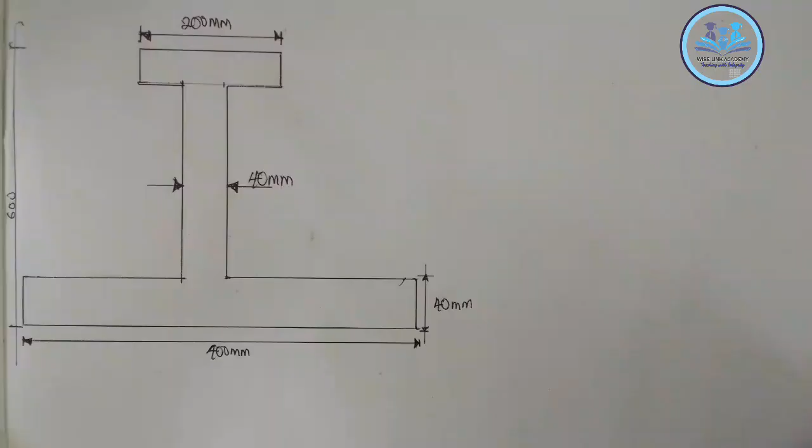Today we want to look at an aspect under mechanical engineering science, which is known as center of gravity.

Center of gravity can be defined as a point in which all the weight, all the mass of a body is assumed to act on.

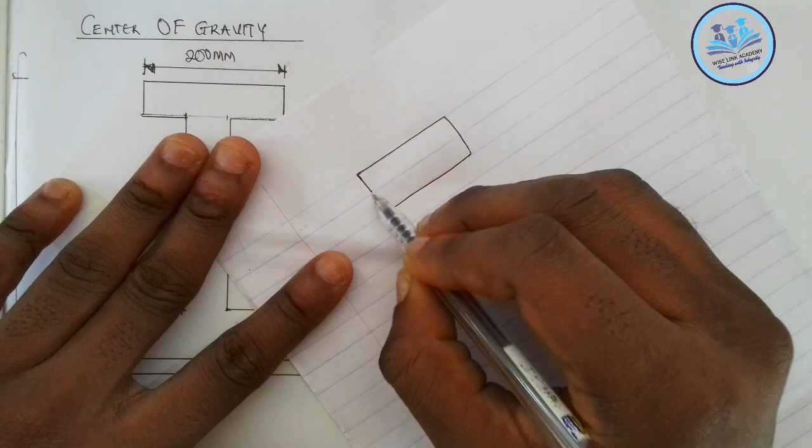That is, if I have something of this nature, a regular shape this way, and the distance from here to here is 200, and the distance from here to here is 100, I am asked to find the center of gravity along the x and y axis. Along my y-axis and along my x-axis. This is my x-axis, this is my y-axis.

Now the center of gravity along the x-axis is moving like this from here to here. The center from here to here will give you 100 automatically. So here will be 100.

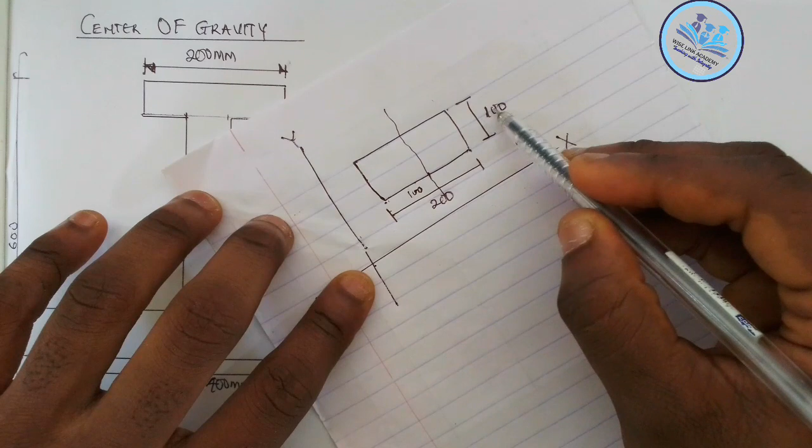Now along the y-axis, you're moving from here to here. Along the y-axis, the center of gravity is 50. So where 50 and 100 meet is this point. So along the x-axis, center of gravity is 100. Along the y-axis, center of gravity is 50. So this is what we're talking about.

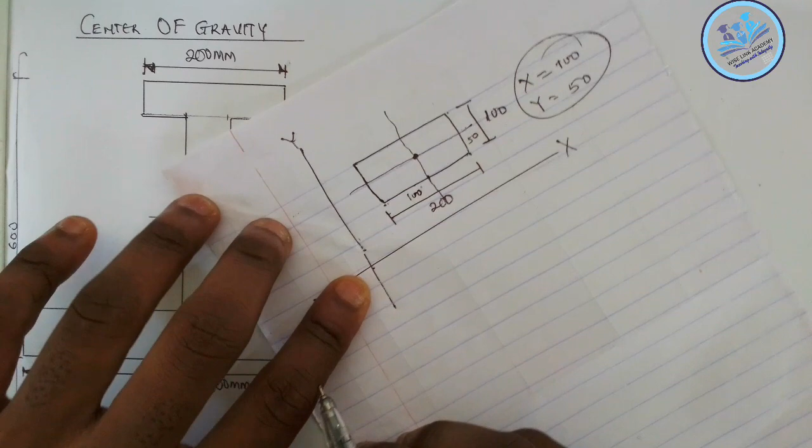Along my x-axis here, center of gravity is 100. Along y-axis is 50. So where they meet at this point is the center of gravity. That's just basic simple knowledge about this.

So now we have to find the center of gravity of this figure shown here. Before you do anything, we look for a way to divide this into the least possible divisions you can divide this shape into. Before we start that, let's look for the way we can divide this. I can divide this into three components.

That is, I can close here up, and I can close here too up. So I can call this component 1, component 2, and component 3. Now what you do is repeat what you have done, by drawing this figure out.

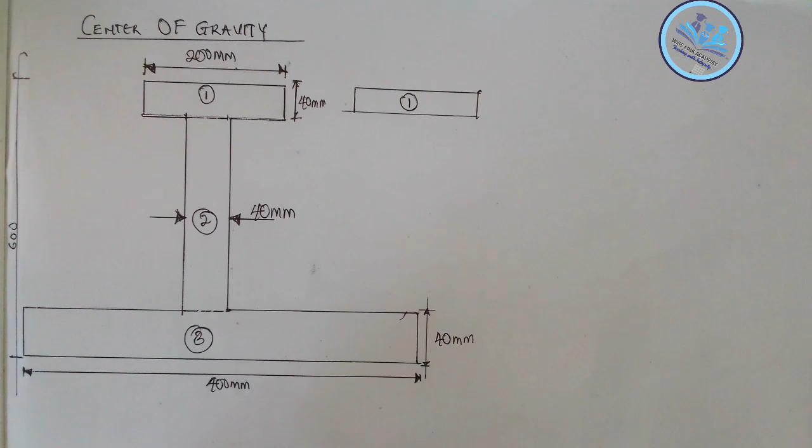Now for this component 1, I've left something out - the distance from here to here is 40 millimeter, I've omitted it, so it's 40 millimeter. Next, this figure 1 has 200 millimeter to be here and 40 millimeter to be here. For this one, it looks something like this.

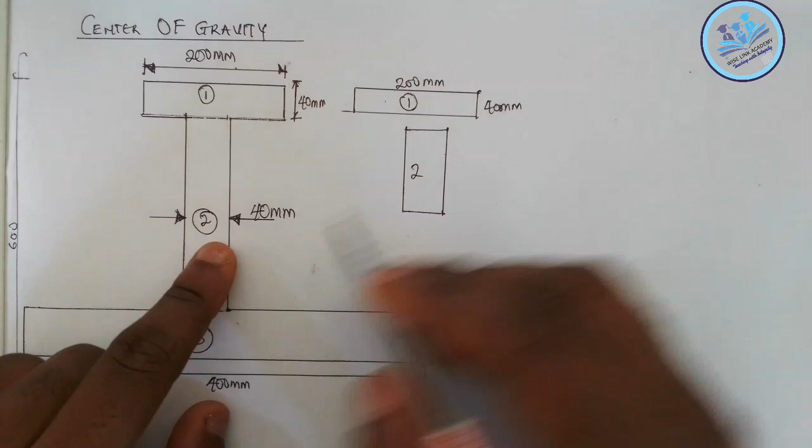For component 2, this simply means thickness, that is from here to here is 40 millimeter, and the distance from here to here - since distance from here to here is 600 - distance from here to here: 40 plus 40 is 80, so 600 minus 80 will give you the distance from here to here, which is 520, if I'm not mistaken.

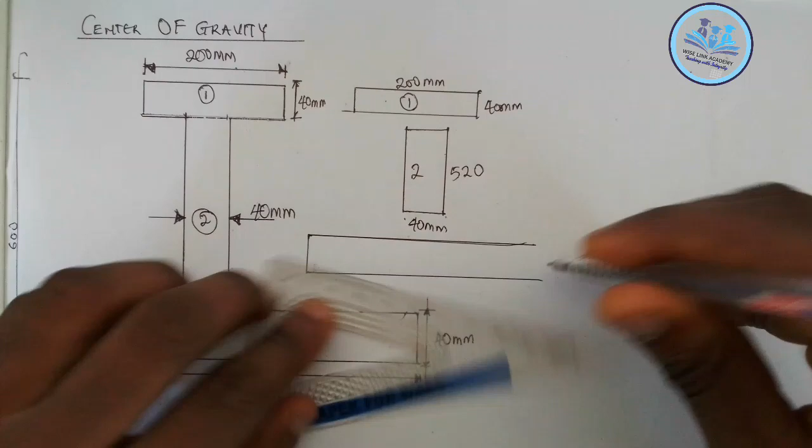So this is component 3. Am I right? I have replicated what I'm having here to be this. Now if I want to start calculating my center of gravity, I'll calculate the center of gravity along the y-axis, and also along the x-axis.

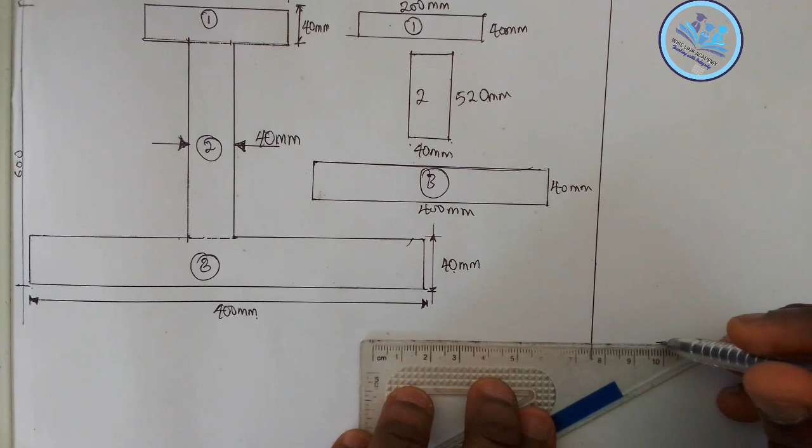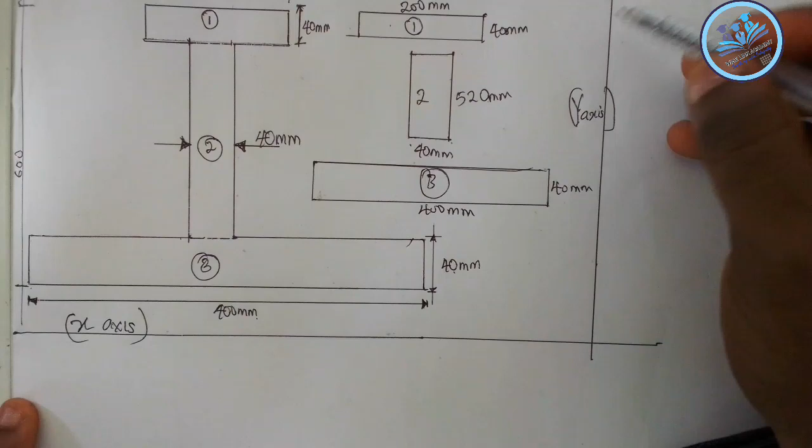So along the y-axis, along my y-axis, along my x-axis - let's add it. As you can see, along the x-axis and along the y-axis. So now let's stop. I'm calculating for my center of gravity along x and y. So what to do now is let's start to calculate for the center of gravity along the y-axis.

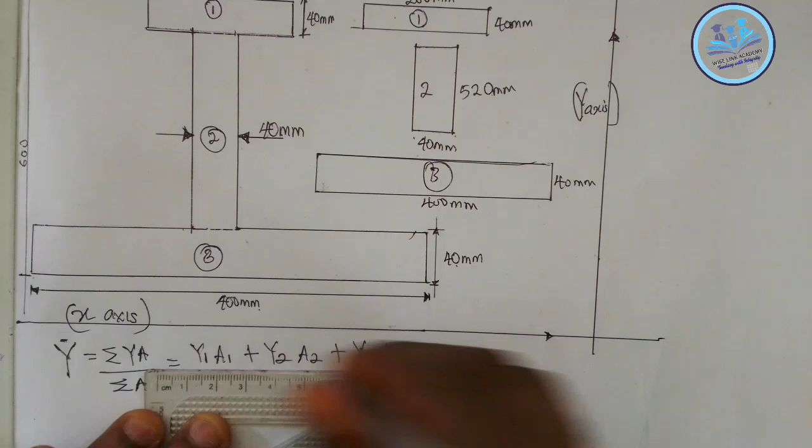Now center of gravity along the y-axis is y bar, which equals summation of ya over summation of a. That simply means y1 a1 plus y2 a2 plus y3 a3, over a1 plus a2 plus a3.

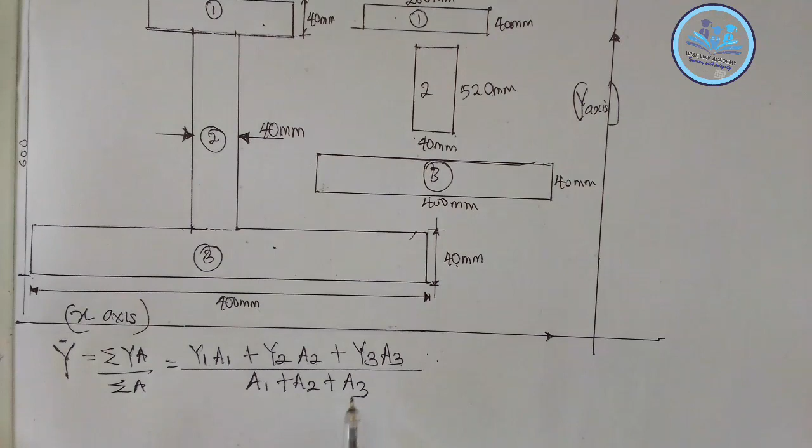Now what do you notice? You're having a1 y1, y2 a2, y3 a3. You can continue y4 a4, y5 a5, because we're having 3 components here, that's why we have all this to be 3. When you're having 4 components, you extend it to y4 a4, and likewise a3 plus a4 plus a5, depending on the component you're having. Now this is the formula for solving a center of gravity along the y-axis.

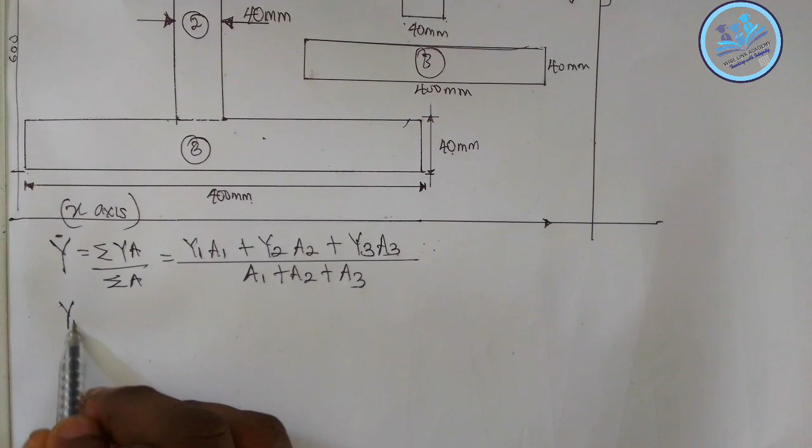Now let's stop. After you have successfully applied this formula, the next thing for you to do - let me show you what I'm doing. The next thing to do is to take your y1, y2, and y3 this way. My y1 to be this, my y2 to be this, and my y3 to be this. Let me show you.

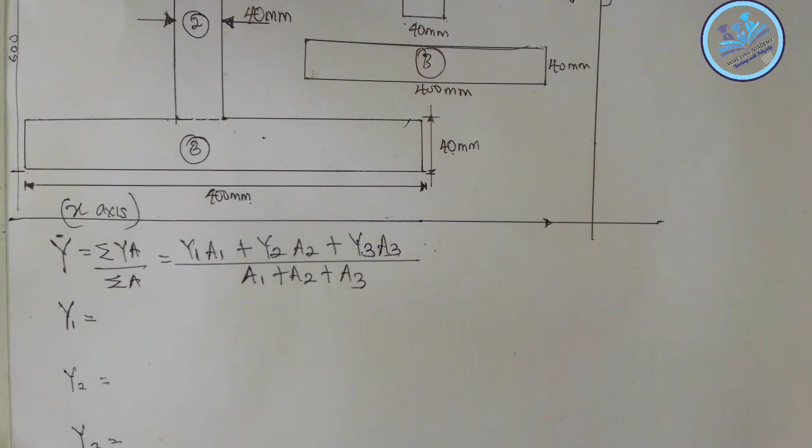Now I want you to recall something here. My y1, that is center of gravity along the y-axis. We are moving upward along the y-axis.

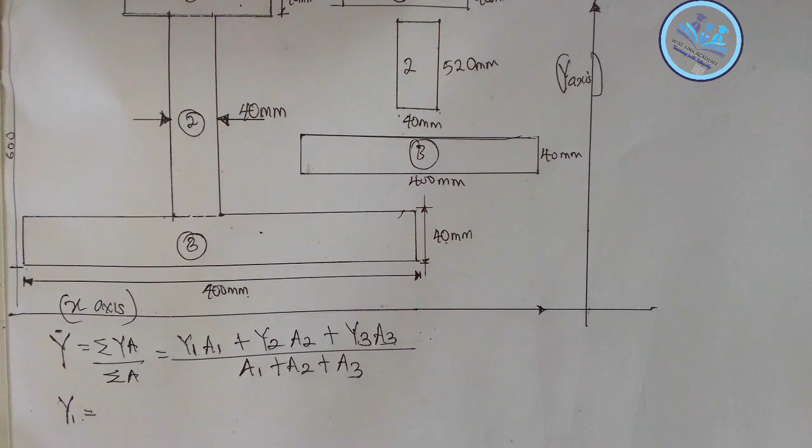y1 simply means center of gravity along component 1. And my component 1 is this one.

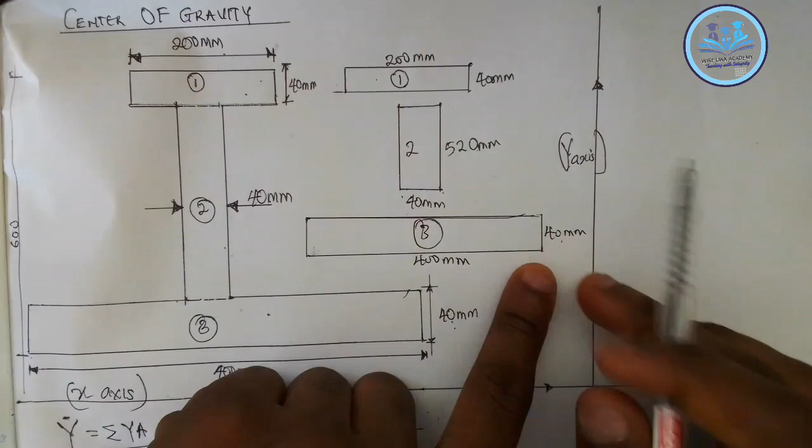For me, this is the ground floor, first floor, and second floor. For me to move from the ground floor to the second floor, I will travel 40 plus 520 before I get to component 1.

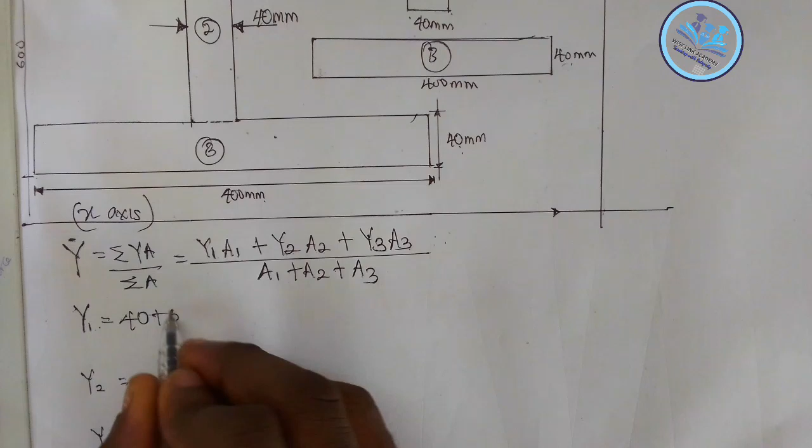Plus, center of gravity along y-axis for this is 20, so just write 40 divided by 2.

So I'll be having 40 plus 520 plus 20. If I add them up, I'll be having 580 to be my answer. So center of gravity along y-axis for component 1 is 580.

Now let's proceed along y2, that is along component 2. If I move to component 2, this is the first floor. I will pass through the ground floor.

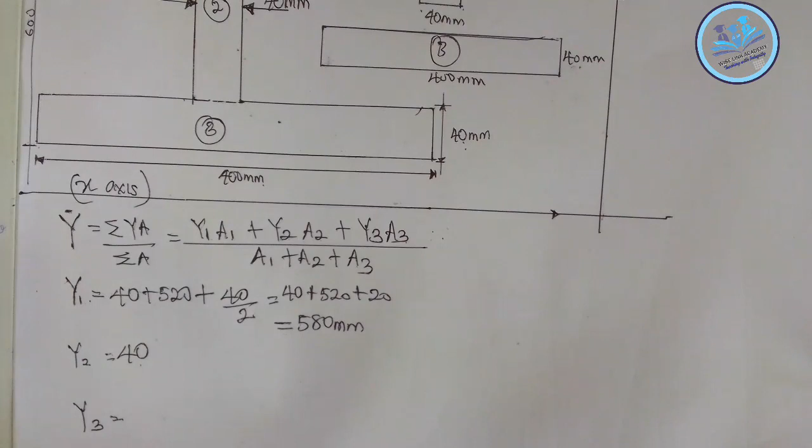So for me moving from this point to this point, I've covered a distance of 40. Don't forget millimeter. So put down your 40, then plus.

Now let's determine the center of gravity along component 2's vertical y-axis. From here to here, the center will be half of this, so you write 520 divided by 2. Automatically I'm having 40 plus, if I divide this, I'll be having 260. So add them up, I'll be having a value of 300 millimeter.

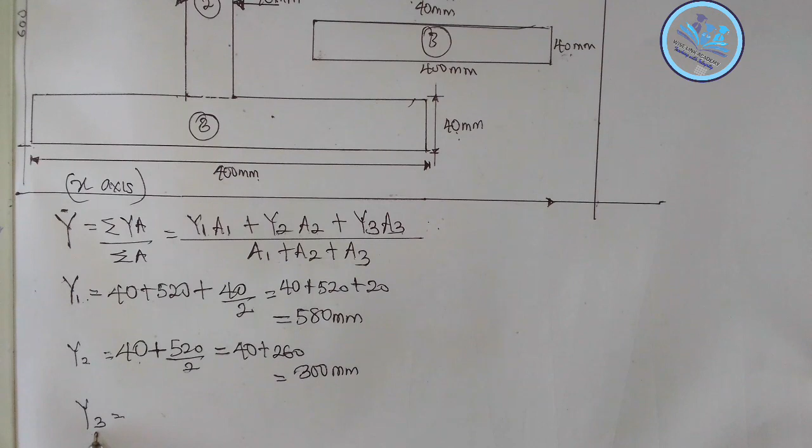Next up, y3, that is center of gravity along y-axis of component 3. Before I move to component 3, will I move any distance? No. So I'll write 0 here, I'll not move any distance.

0 distance plus center of gravity along y-axis for this, which is 20, so just write 40 divided by 2. That will now give your 20 millimeter. Don't forget, in this formula we're having y1, y2, y3.

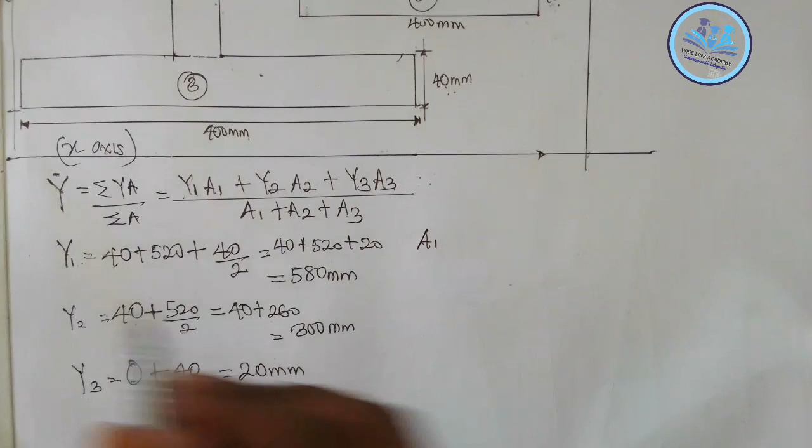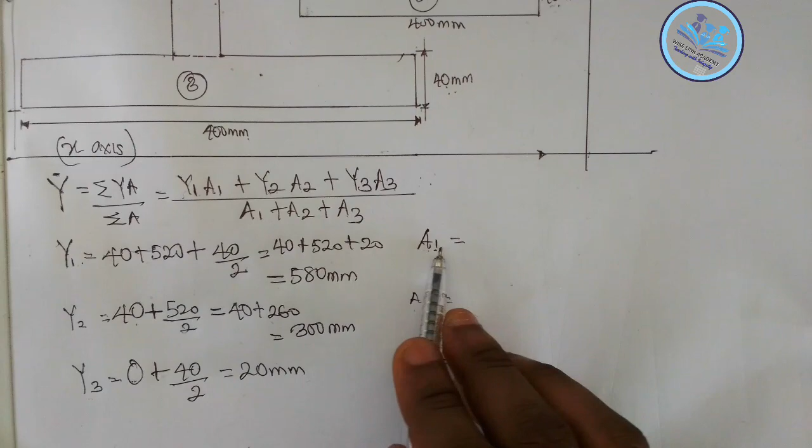We have done that. So we're having a1, a2, a3 — put them here. A1 for y1, a2 for y2, a3 for y3. Now, area of component 1, area of component 2, area of component 3. They are all looking like a rectangle, am I right?

So to find the area, you just multiply them together: length times breadth, length times breadth, length times breadth. Along component 1, I'm having 200 times 40. Time them together, you'll be having 8,000.

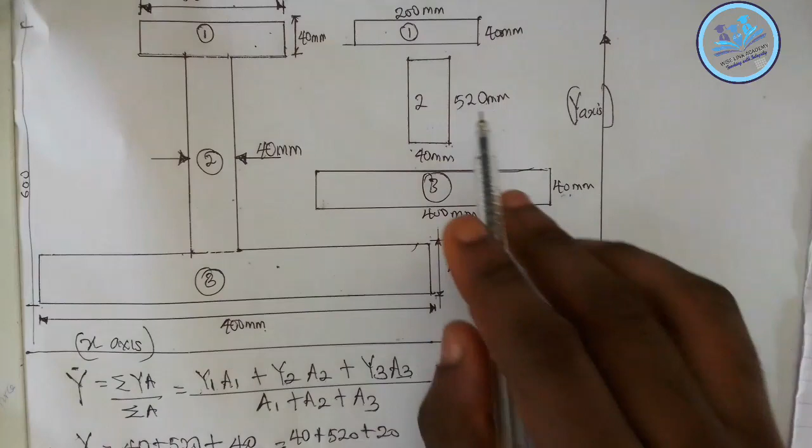So area of component 2 is 520 times 40. Times them up, you'll be having 20,800. Component 3, the area of component 3.

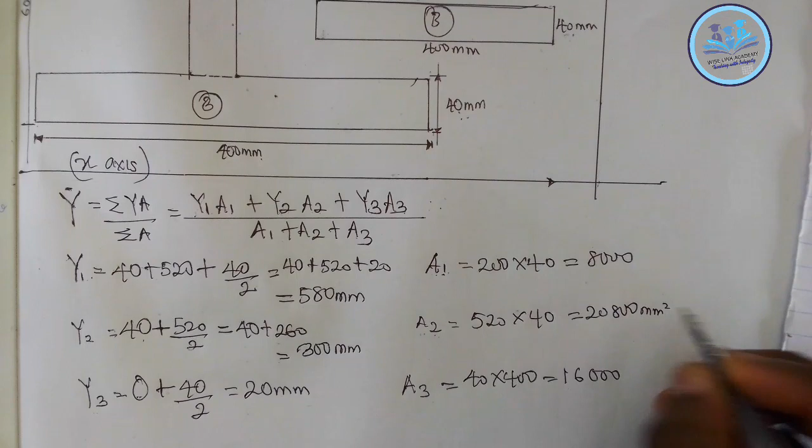Length times breadth, this times this, I'll be having 40 times 400. If I do that, I'll be having 16,000. Don't forget millimeter square, millimeter square, millimeter square.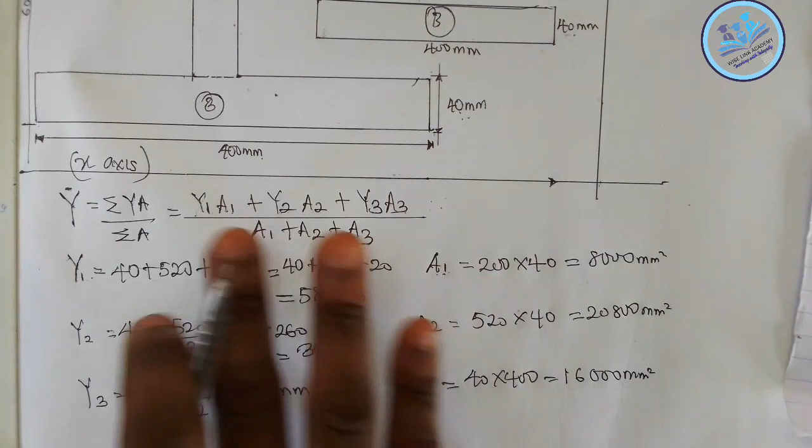Now I have calculated all what I want: y1, a1, y2, a2, y3, a3. So next up, now let's apply the formula to solve the question.

y bar is equals to y1 times a1. y1 is 580, times a1 which is 8,000. We bracket it this way. Plus y2, a2. y2 is 300, a2 times this gives 20,800.

Plus y3, a3. y3 is this, a3 is this, you times it together, that's 20 times 16,000. So divided by a1 plus a2 which is 20,800, plus a3 which is 16,000.

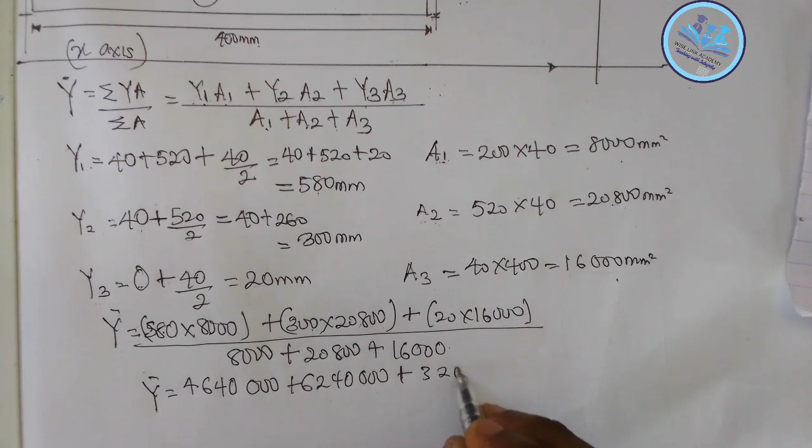Now my y bar will automatically be — if I times this and this together, I'll be having 4,640,000. Plus if I times this value together, I'll be having 6,240,000. Plus if I times this value together, I'll be having 320,000. Now divided by what? If I sum up all this, I'll be having 44,800.

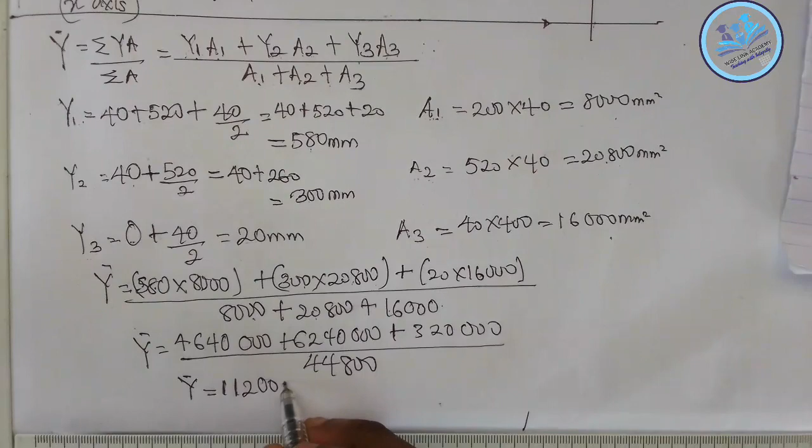So my center of gravity along y-axis will now be: y bar equals, if I sum up all these values, I'll be having 11,200,000 divided by 44,800. If I divide the two of them, I'll be having 250 millimeter. So center of gravity along y-axis is 250 millimeter.

Now, let's go and calculate for center of gravity along the x-axis. So now to do that, let me show you at this point here.

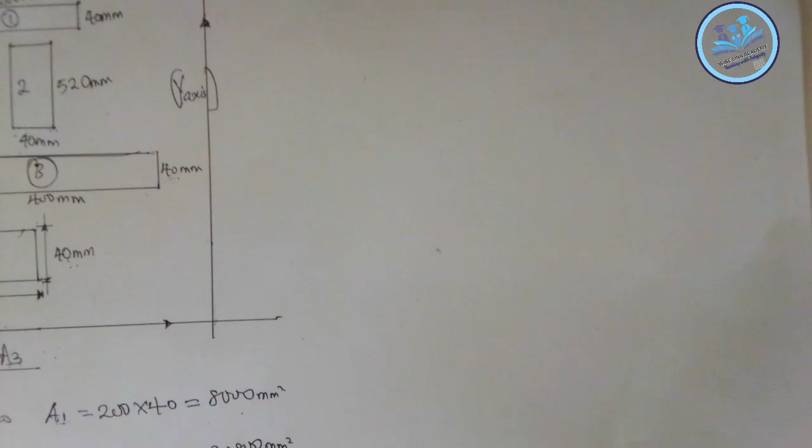Center of gravity along x-axis, x bar. The formula says center of gravity along x-axis is the same as summation of xa over summation a. That is x1a1 plus x2a2 plus x3a3, since I'm having three components, divided by a1 plus a2 plus a3.

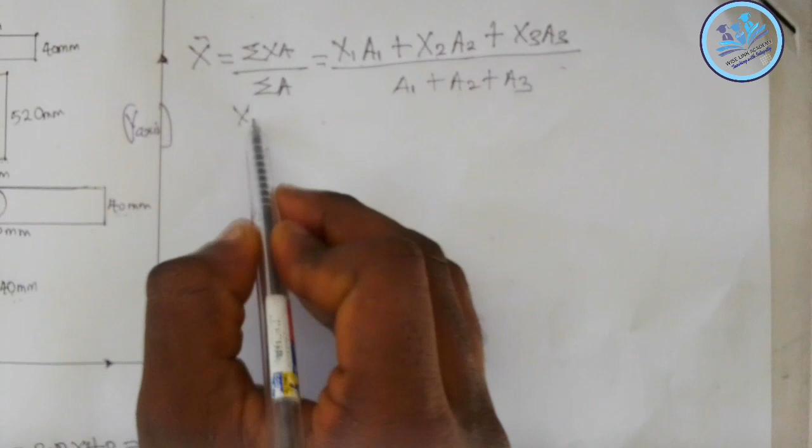Let me show you what I'm saying: x1a1, x2a2, x3a3, over a1 plus a2 plus a3. It's the same idea as the y-axis formula, just change y to x. So we write x1, x2, x3 here.

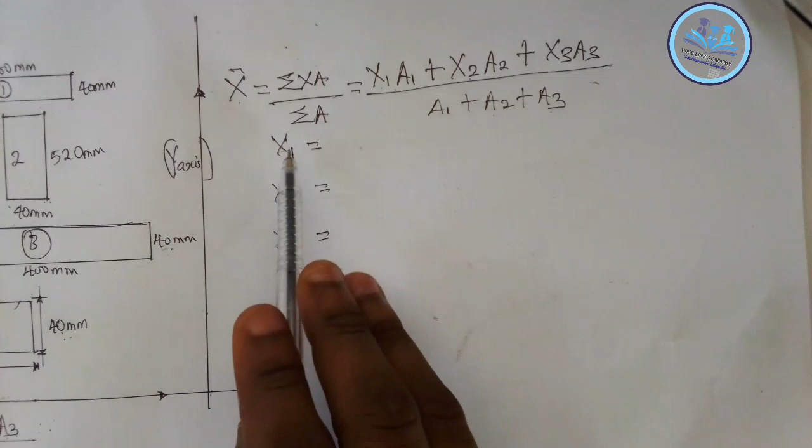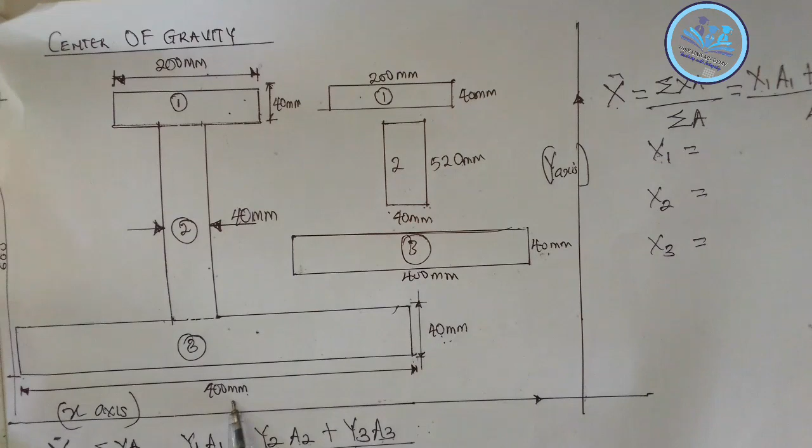Now calculating center of gravity along the x-axis for component 1, let me show you how it's done using this plane figure. Observe from here to here is 400.

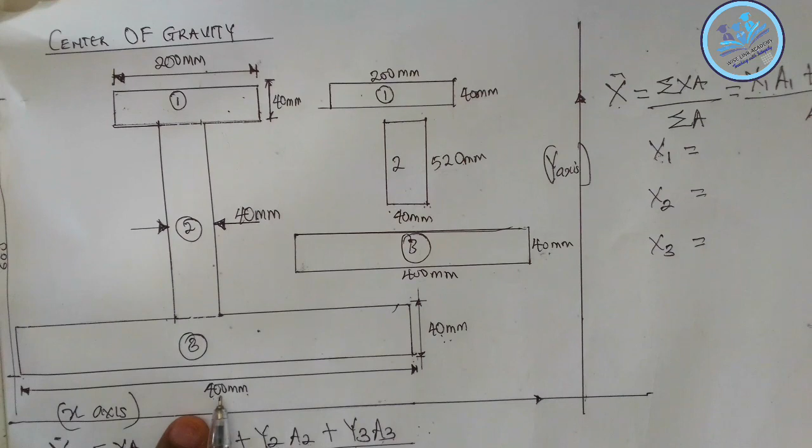Now what is the x-axis distance for component 1? Before this, from here to here is 200. Before I move to 200, I'll cover a distance of 400. Understand this well. So 400 divided by 2 gives 200 here and 200 there. For me to move from here to here, I cover a distance of 200. From here to here, also 200.

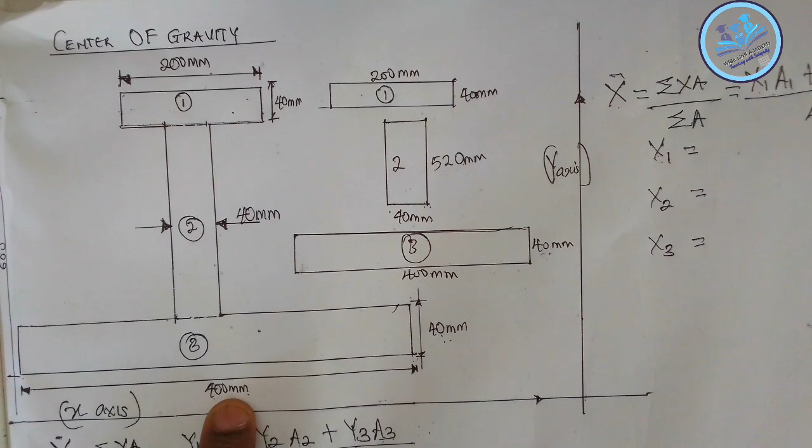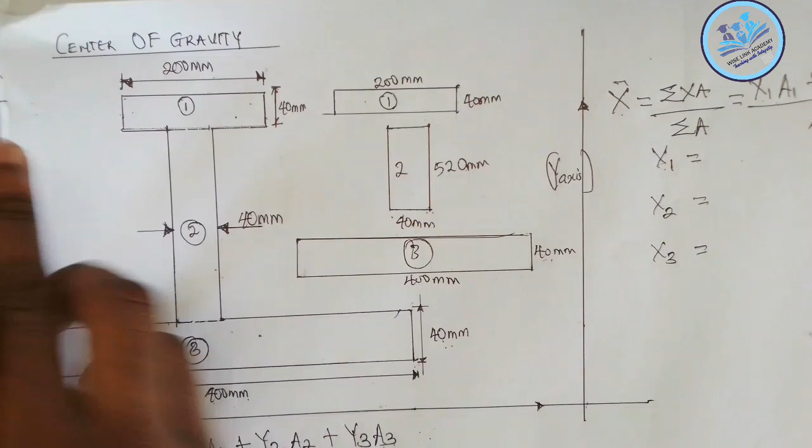Let me explain again: this is a distance of 200. If you put this 200 down here, you're left with 200, so 100 here and 100 here. The distance from here to here is 100. Similarly, taking this up with 200, 100, 100 gives us 400. So 400 minus 200 gives us 200. With 100 here, 100 here, and so on, that totals 400 along the x-axis.

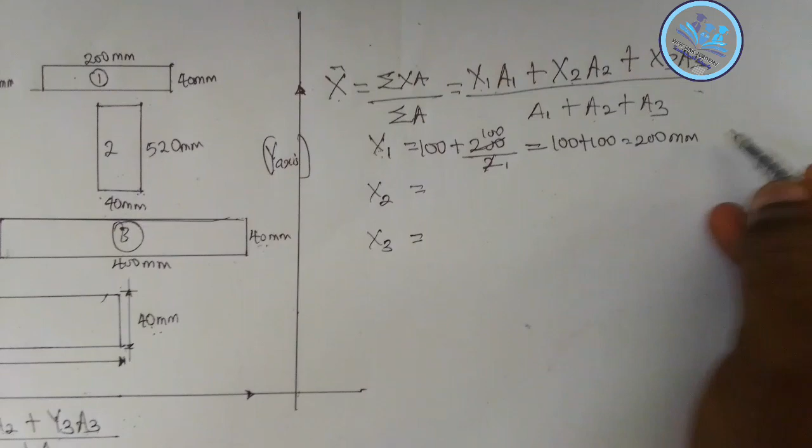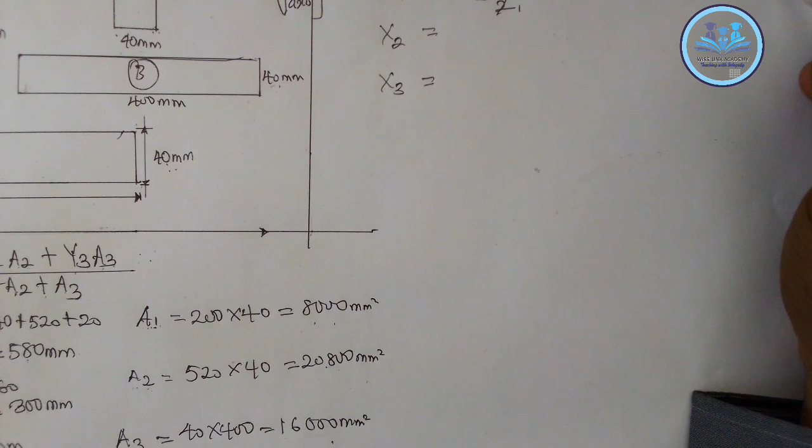A1 is 8000 millimeters square. So now we put that value down: 8000 millimeter square. Therefore for the x-axis, these two x-axis values.

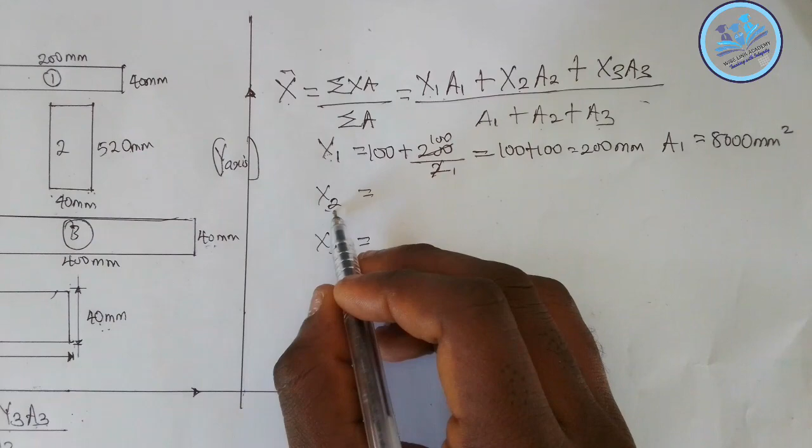Let me show you: this is my plane figure this way. Now this has a distance of 40. I want to know the distance it covered before it moved to 40. That will be 400 minus 40.

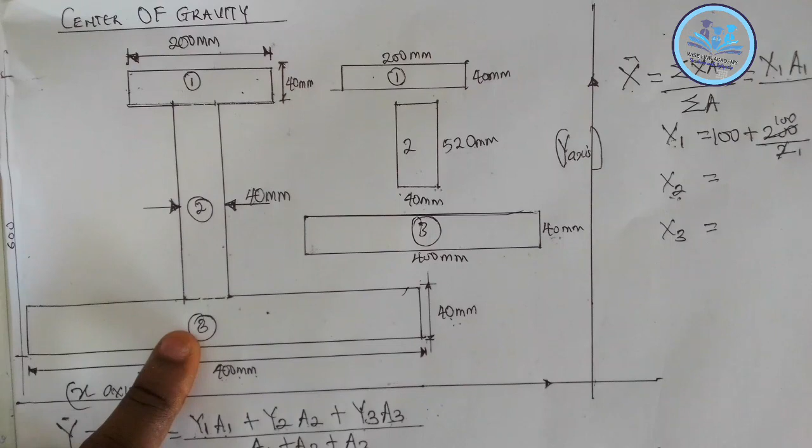That gives us 360. Now 360 divided by 2 is 180. So from here to here is 180, from here to here is also 180. Plus 40 is 400. So for me to move from here to this point on the x-axis, I'm moving like this. For me to move from here to here, I'm moving 180.

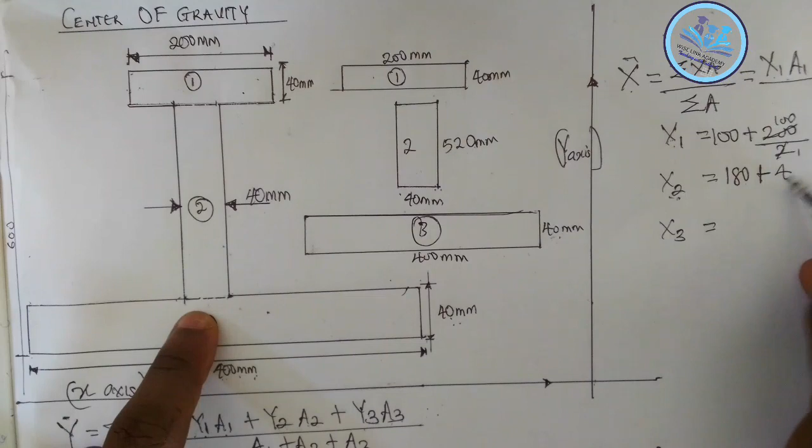180 plus... so I move a distance of 180, plus the center of gravity along x-axis, which is 40 divided by 2, that is 20. So 180 plus 20 gives us 200 millimeters. So area 2 is the same as that area 2 we got, which is 2000 millimeter square... actually 20,800.

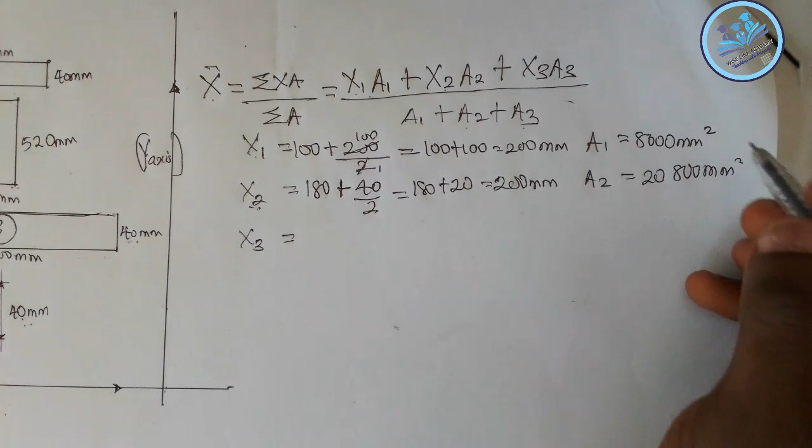That is 20,800. Let me show you: this is my area 2 here.

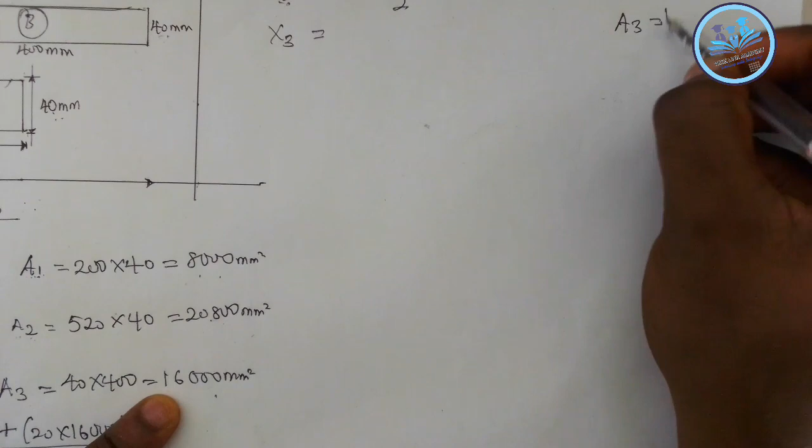Similarly for area 3, let me put it down this way. Area 3 is this value, 16,000 millimeter square. Now let's calculate the x-axis value for component 3, using this plane figure.

Distance from here to here is 400 automatically. Did I cover any distance before moving to this point? No distance covered, so that's 0 plus this 400 along the x-axis divided by 2, giving us 200 millimeters. What do you observe? 200, 200, 200. Let me show you what I'm saying.

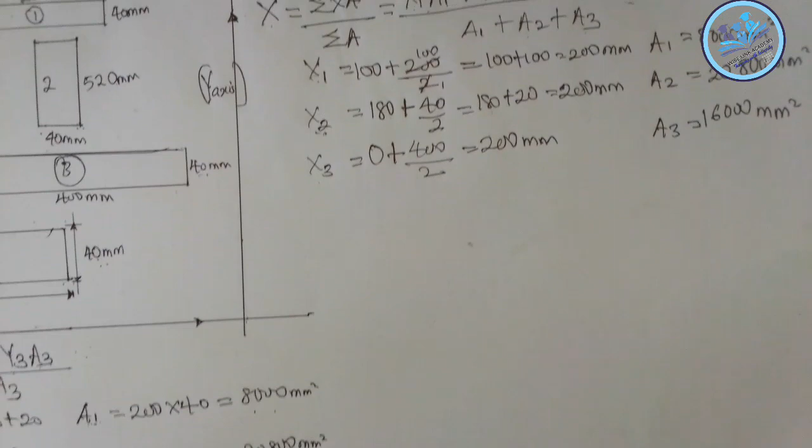As you can see, I'm having 200, 200, 200 along my x-axis. So I have to find from my x-axis x1, x2, x3, a1, a2, a3.

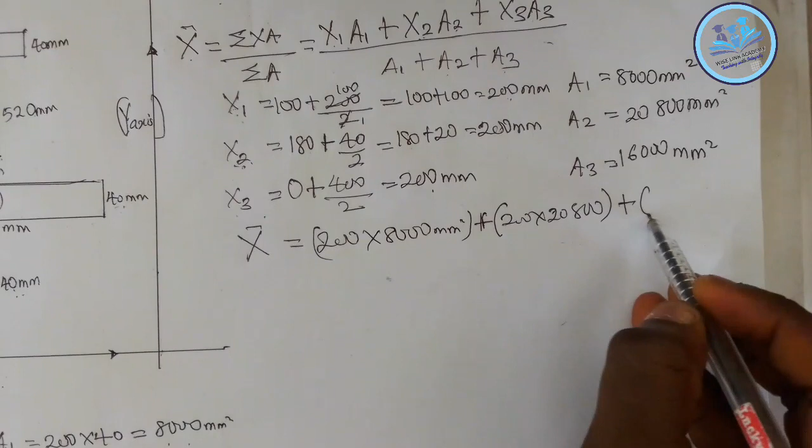Now let's substitute the values. My x bar equals x1 times a1. Value for x1 is 200 times a1, millimeter square, plus open bracket x2 a2, that is 200 times 20800, plus open bracket, my x3 a3, x3 is 200 times a3.

16000, so divided by, as you can see, a1 is 8000 plus a2 is 20800 plus a3 is 16000. So my x bar will now be, if I times this together I'll be having 1,600,000, plus if I times this together I'll be having 4,160,000, if I times this together I'll be having 3,200,000. So divided by, add this together, I'll be having a value.

If I add this together, this value down here, I'll be having 44800. So my x bar will now be, if I add them together here, I'll be having 8960000 divided by 44800. So my answer, my x bar will now be what?

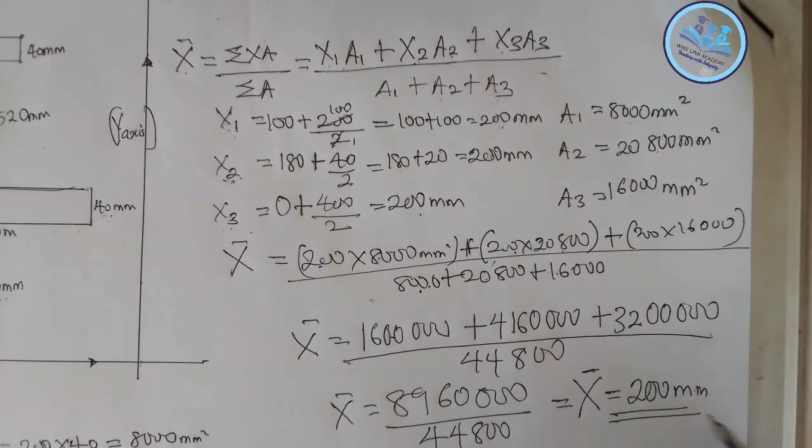My x bar is equals to, center of gravity along x-axis is 200 millimeter. So my final answer: along my y-axis, center of gravity along y-axis is 250 millimeter. Along my x-axis is 200 millimeter. This is our answer.

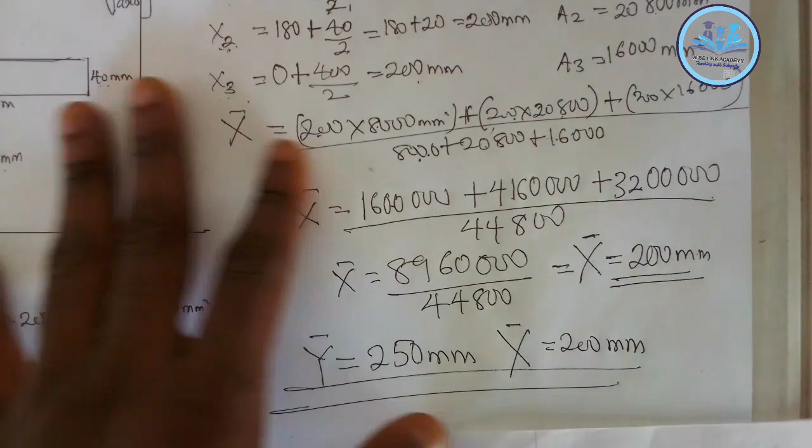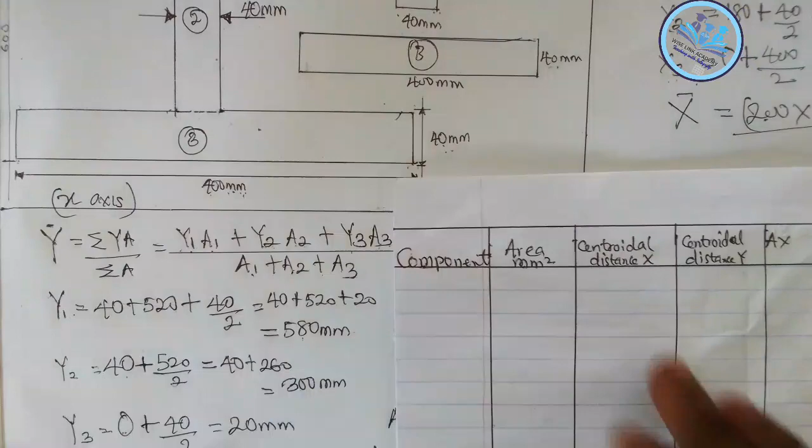But if we are given a table this way, to complete this table, after you have solved all this, as you can see what I've solved. Now, how many components do we have here? We have just 3 components: Component 1, component 2, and component 3.

So area for component 1, we come to this point here. Area of component 1, area of component 2, area of component 3. So we know that their area is the same if you observe very well. Area for y-axis, x-axis, we are using the same area for all of them. So our area is what?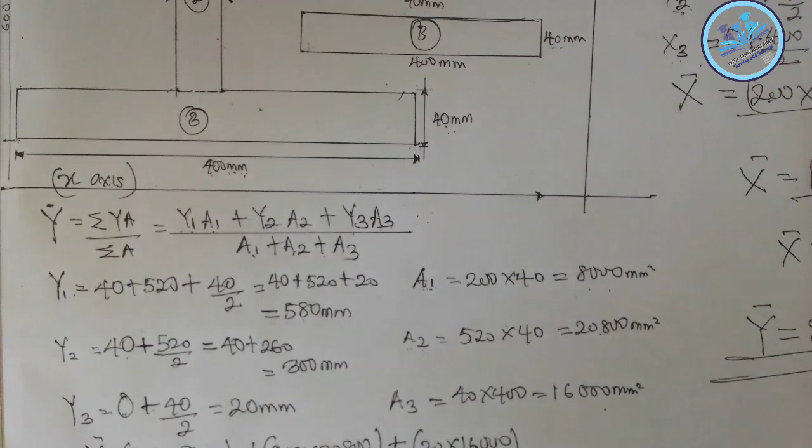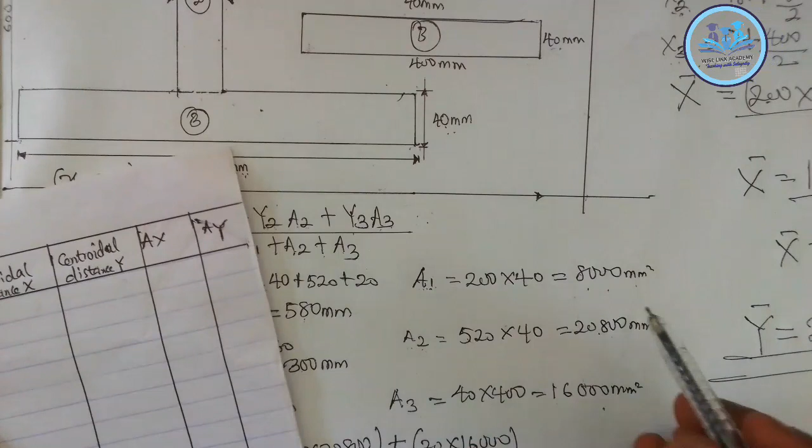The first A1 is 8,000. Area for this is 20,800, for component 3 is 1600, 16000. Is it here? Am I right?

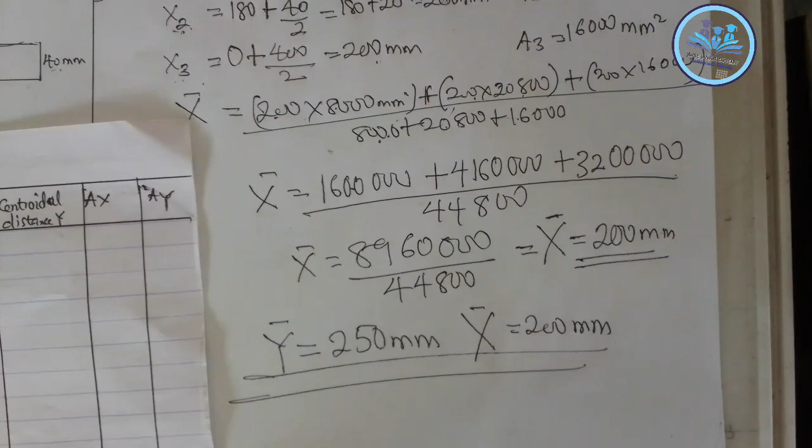Now, centroid distance along x-axis, that is center of gravity along x-axis for component 1. They are all here, just insert the values. That is, I'll show you.

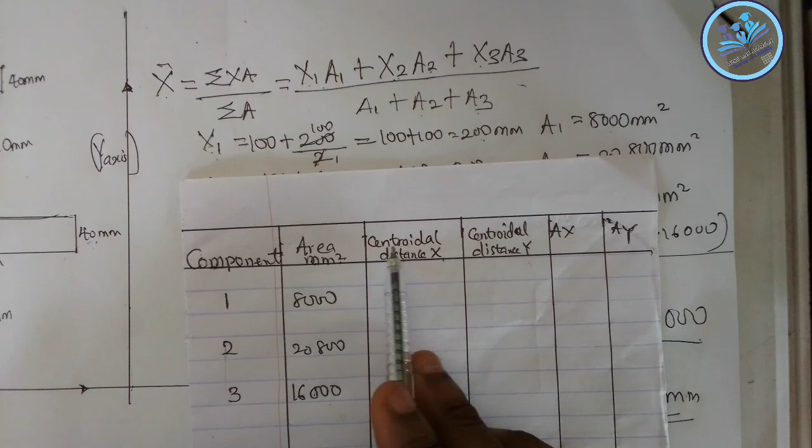Now you take your reading this way. So centroid distance along x-axis. Am I right? So along my x-axis, center of gravity is 200. So it's two, all of them is 200. X2, 200, X3 is 200. Along my y-axis, you come to your y-axis.

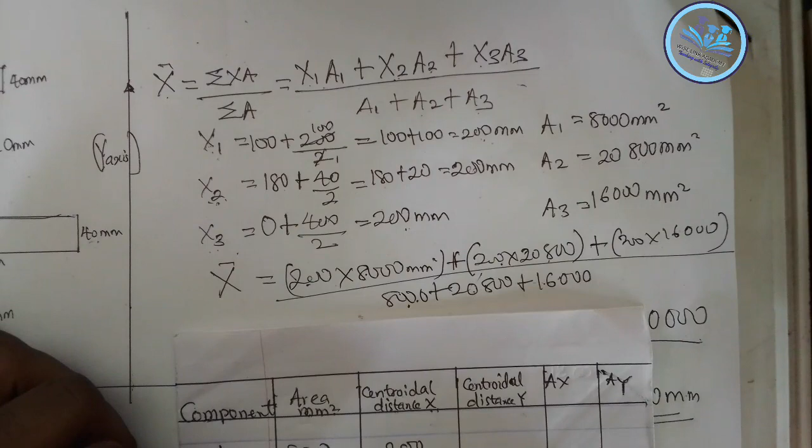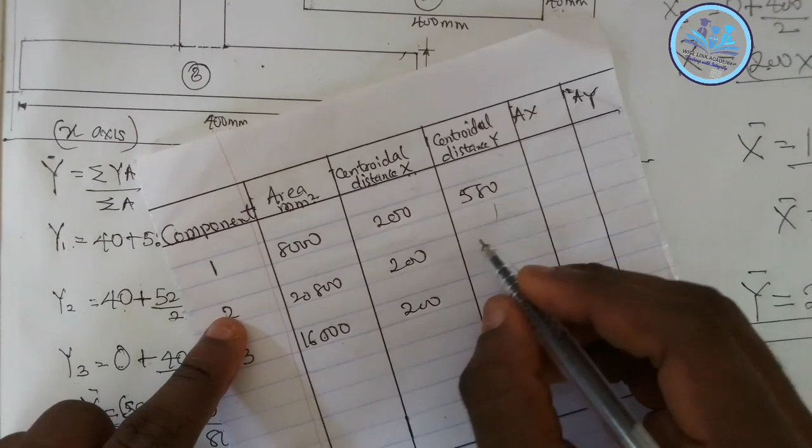My y-axis, I'm having center of gravity on y-axis on component 1 is 580. Component 2 is 300, I'm having 300. Component 3 is 20, I'm having 20 this way. As you can see what I'm doing.

So now the last one is AX, it's just A times X. Can you see that? Component 1, A times X, you get your answer. Component 2, A times this, A times X, yes, you get your answer. Component 3, same A times X, this times this, you get your answer. We have done those, we have done everything, just insert them.

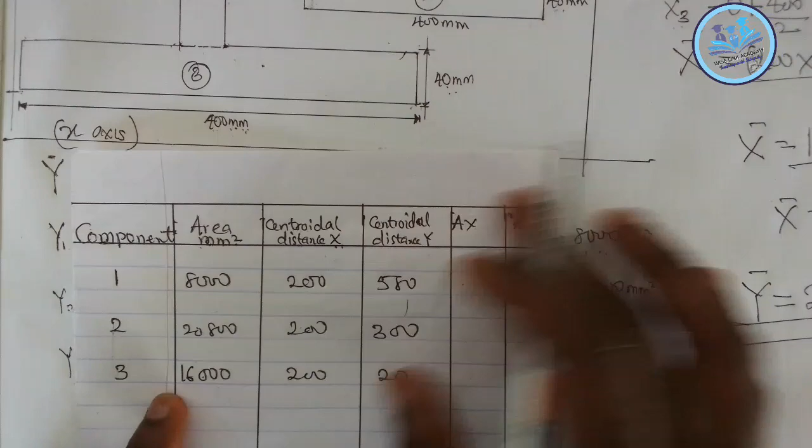Now come to, let's start with component AX. See, come to component AX, come this way. Take your value upward this way. So now, looking at it, my component AX will be, this is my AX. That is, if I take my readings, AX will be, this is AX.

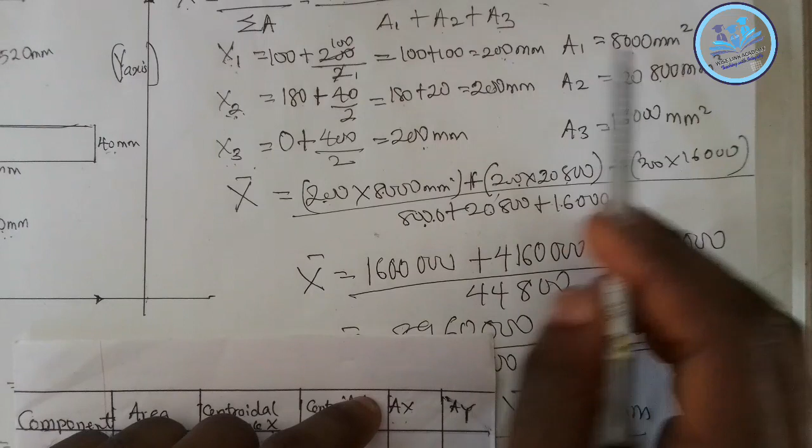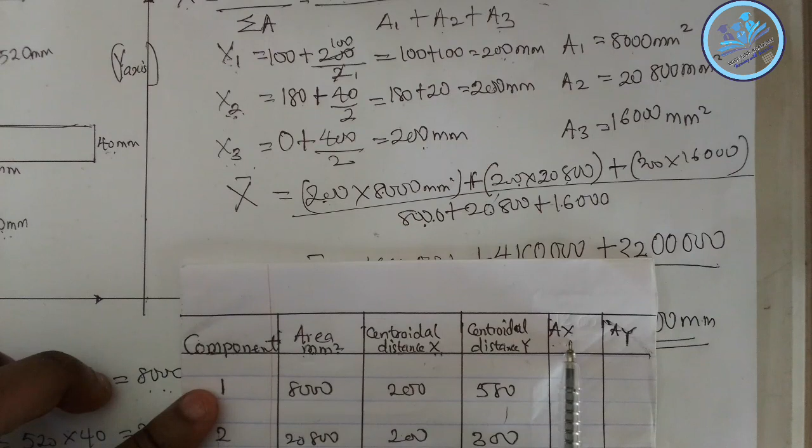AX, now for component 1, component 1 is this value. Component 2 is this. Component 1 area is this value. So if I times together, that will give you AX. So my AX for component 1, along x-axis, the x times A, for this is area times x, that is x1 times A1, because I do component 1, so x1 times A1, so the value is what given us here. This answer is what I'm able to write here. So answer is what?

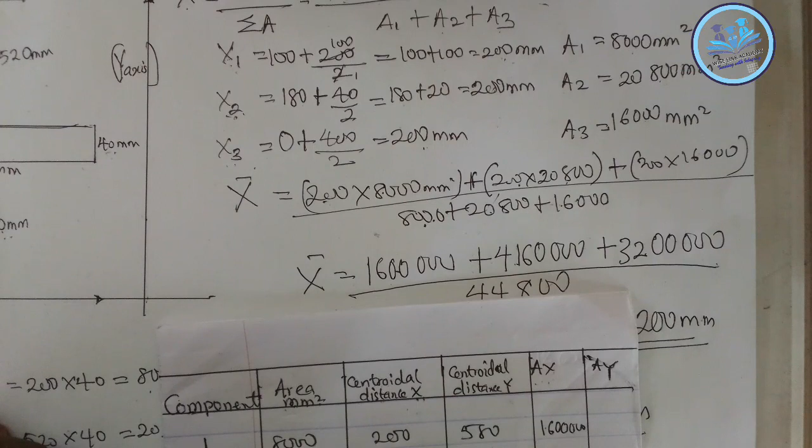1600000, yes, this value here. So the other one will be this value, this next value, 4160000. The third one will be this value, 3200000. Now for my y-axis too, it's the same thing.

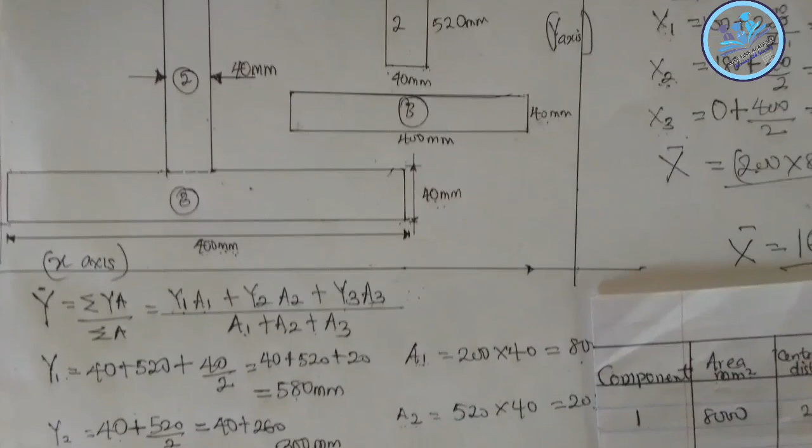You come to your y-axis this way. You see my y-axis showing you this. So A1 Y1, so simply means A1 Y1. This multiplication of each of them is this.

So now my Y1 will be 4640000, and this is 6240000, and this is 320000. So this is, I've composed for this table. I've already completed this table.